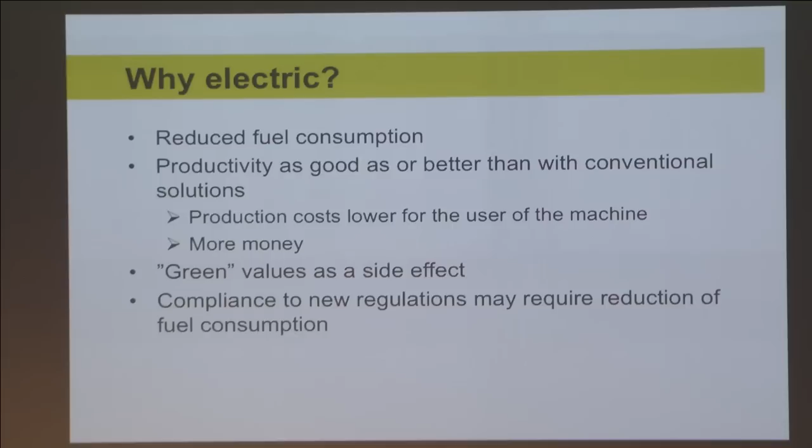And of course, green values come as a side effect - we create less carbon dioxide emissions or small particle emissions and so on. It's easy - or I'm not a salesman, of course, but it should be easy to sell this to companies. Practice might be different. Another driver is new regulations demanding manufacturers of work machines comply with stricter emission requirements, including small particle emissions.

Here are a couple of examples of electrified or hybridized mobile work machines to give a better idea what I am talking about. The first one is an excavator which has a diesel engine, the red one here, which turns the electric generator, the green, controlled by an inverter that transforms the electrical energy into DC. In the DC link, which is this yellow part, we have an energy storage device, this blue box, which could be a supercapacitor for example. And here is an actuator, an electric motor, driven by another inverter, the bluish box there.

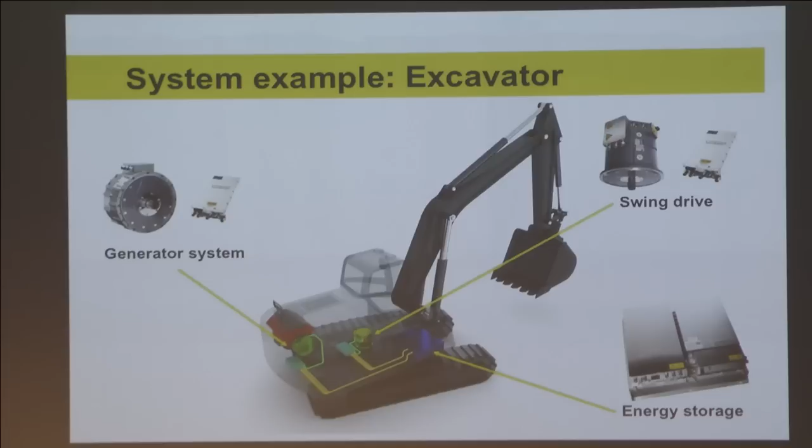So what this machine does - well, it's an excavator, it excavates stuff like this. When it does only this, the electrical system doesn't have much to do. But when it accelerates and then decelerates to dump the earth someplace else, then there is potential for storing the kinetic energy and then releasing it again when accelerating and decelerating. So here we have one key requirement for energy saving, which is usually cyclic operation.

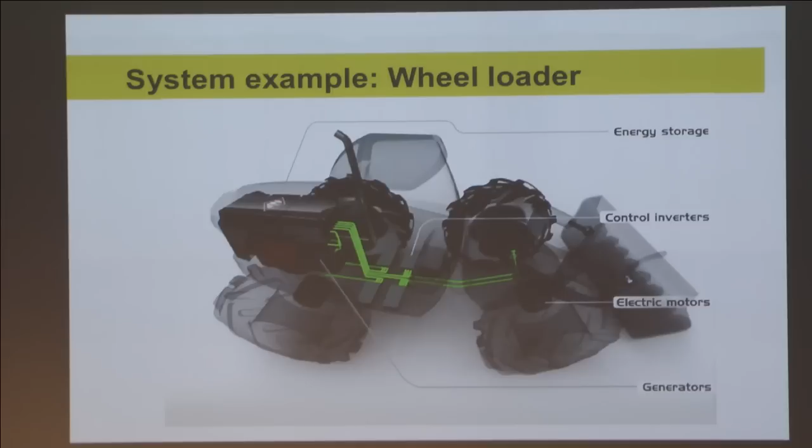Another similar example is this wheel loader, which uses electricity to drive the wheels. There are 4 drive motors in the wheel hubs, and then there are again these same components: the diesel engine turning the generator and the supercap in the DC link. So here we accelerate and decelerate when we load stuff into the loader.

Now, as this is a scientific conference, I thought it would be fitting to include some points on different topics which we consider important or interesting in our field of application. Electric machines are relatively old technology, 100 years or more, but still development takes place and needs to take place because requirements are changing.

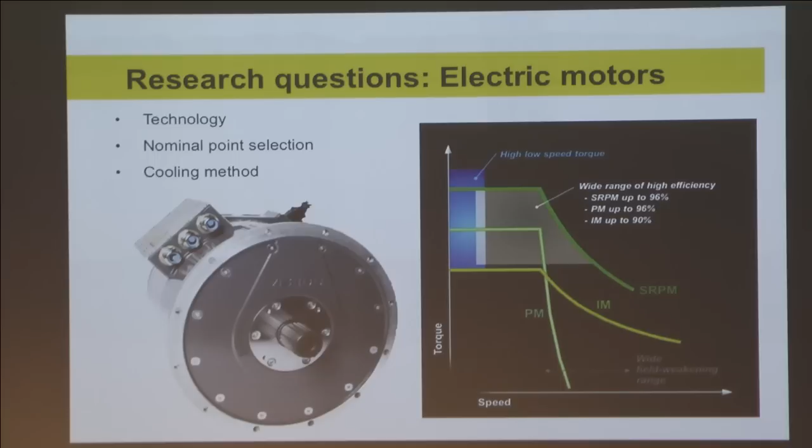In the mobile work machine segment, customers usually want the world's strongest man and the fastest man to be the same man. Namely, they want a lot of torque in the low speed range while being able to run very fast deep into field weakening, or better still, run very fast without getting into field weakening. So demands are conflicting. New technology has emerged - our current solution relies on permanent magnet machines with some reluctance torque also in them.

New technologies might be suitable, switched reluctance machines, for example. Then, whatever the technology, we need to select the nominal point and the characteristic of the machine so that we find an acceptable compromise between these demands of speed and force.

Cooling is something important in mobile machines. Air cooling is not usually very good. You have a lot of dirt and other obstacles in air cooling, and fans are easy to break if you have external fan motors, which is not usually the case in electric motors. But anyway, air cooling is not good. Liquid cooling is better. That liquid in our products is water or water glycol, but also oil cooling would be interesting in some cases, and this has been studied.

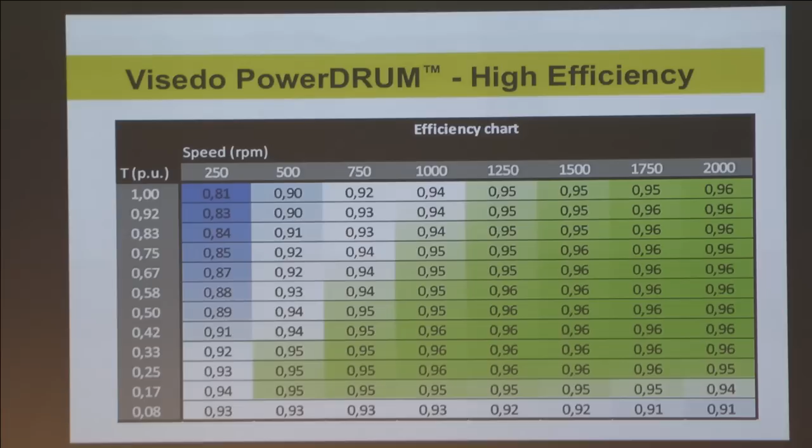Another requirement is to have the machine work efficiently in a wide set of operating points. Here is an example of our own machines and their efficiencies. So it's not enough to make a good machine in the nominal point, we want to run it in different points.

Motors are one thing, or generators and motors, and then we need power electronics to control these motors. Drives or inverters pose some interesting questions to us. Motor control is also not a very new art, but still there remains things to be studied, especially if we develop new types of motors. And we need, of course, good control to run them.

Safety systems, DC link capacitance sizing, efficiency. We need to have also in inverters a very wide operating point set where we run in high efficiency. And we also would like to minimize the losses in the inverter to minimize the need for cooling.

Then lifetime: the loads in mobile work machines are very often cyclic, and they need to be handled well if you want to save a lot of money. The requirements for semiconductor durability, lifetime, and performance with aging are high. And then cooling here is a major thing too. Transporting heat is not often as easy as it sounds.

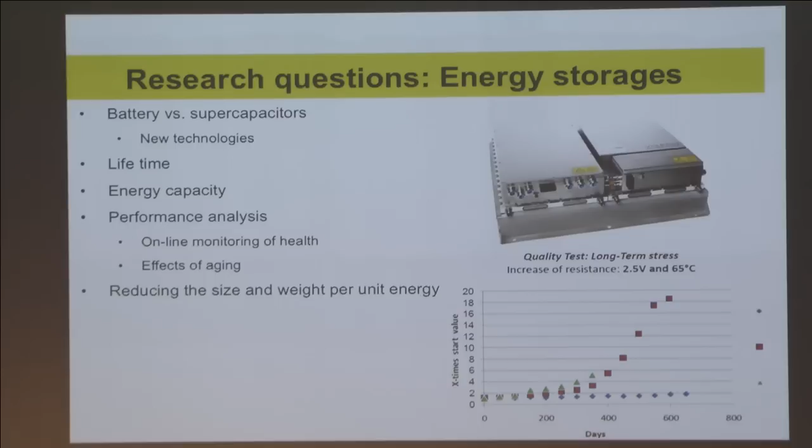Here are some comparisons of some unnamed technologies with cyclic loading in high temperature, 65 degrees. And the best is, of course, our solution.

Now, I personally think that this systems part is the most interesting here. Component sizing is, of course, the first thing to, well, if not optimize, then at least make good enough. Pick the correct size for the diesel engine, for the generator, for the motors, and so on.

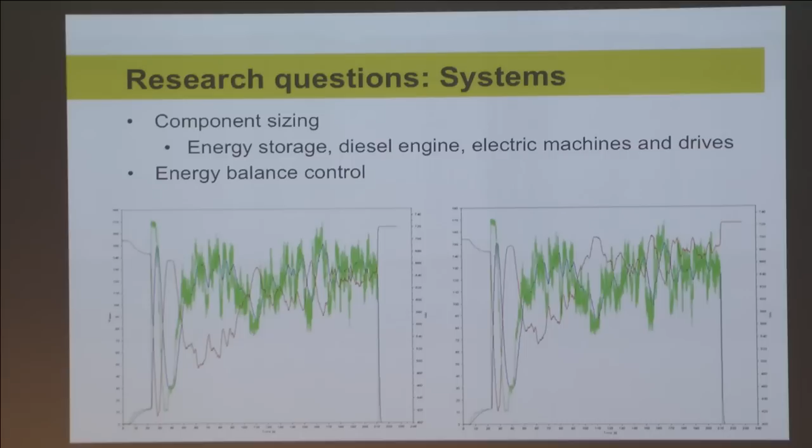If you let the voltage drop low, you are using your energy storage efficiently. The diesel will probably sound more civilized, it's running on lower speeds. But then again, you increase losses in your electric system, and you don't perhaps have the torque reserve needed for some high load peak. So if somebody would tell us what's the optimal way to control the energy storage voltage or capacity level, we would be very happy.

Well, system problems don't end here.

Sometimes it would be interesting to see comparisons between series hybrid and parallel hybrid. Energy flow management, the control principle - who controls the voltage? Is the voltage controlled? Do you calculate powers, or what do you do?

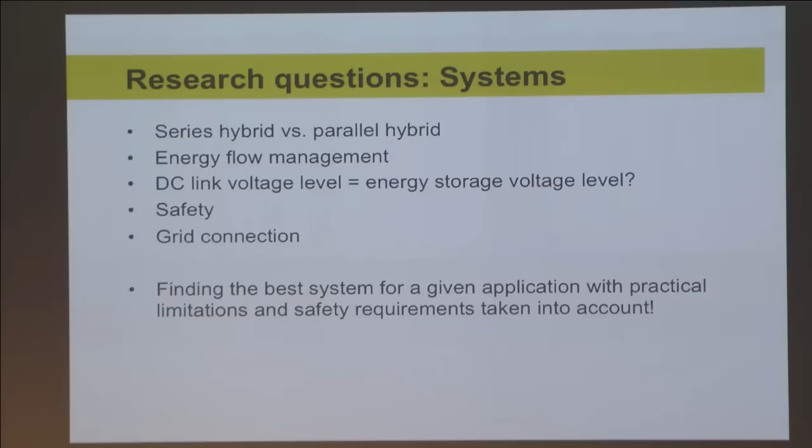That's something interesting. The next point is a question: should the DC link voltage be the same as the energy storage voltage? This translates to a question of whether we should have a DC-DC converter in between. This would eliminate the excess losses caused by low DC link voltage and allow the electric system to run with better efficiency. But then again, a DC-DC converter with sufficient current handling capability is not cheap. So would it be economically feasible to use one?

Safety in systems. What do you do if an inverter trips? How do you brake then, and so on? Grid connection could be used in some cases when you park the machine somewhere to do the work. Then you could plug in and take some energy from the network instead, which is usually cheaper than buying diesel.

So all in all, it would be a matter of finding the best, or actually even good enough system for a given application, with the limitations posed by the application taken into account.

Now for the actual beef of the show, which was to crush - literally or less literally - the fuel consumption. The example is a stone crusher from an Austrian company called Kormann Rockster Recycler. It's not a particularly big stone crusher, but still quite an awesome machine.

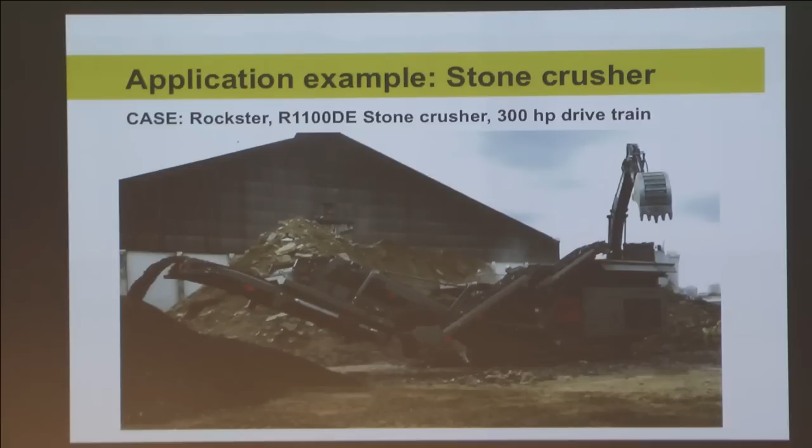It's used to recycle material. In this picture, you see that there are some concrete slabs and sand and stones here - probably the remains of a demolished house. This picture was taken at the Rockster test field in Austria.

So it's a series hybrid machine where we generate electricity from diesel into DC and then consume it in the crusher motor. So there's no mechanical connection between the diesel and the crusher.

Here is an unnecessarily complex figure of the same thing. I just left it as it is to show that there are a lot of little pieces other than the ones mentioned. Here's also shown a network connection option, which was not implemented in this first prototype or first machine.

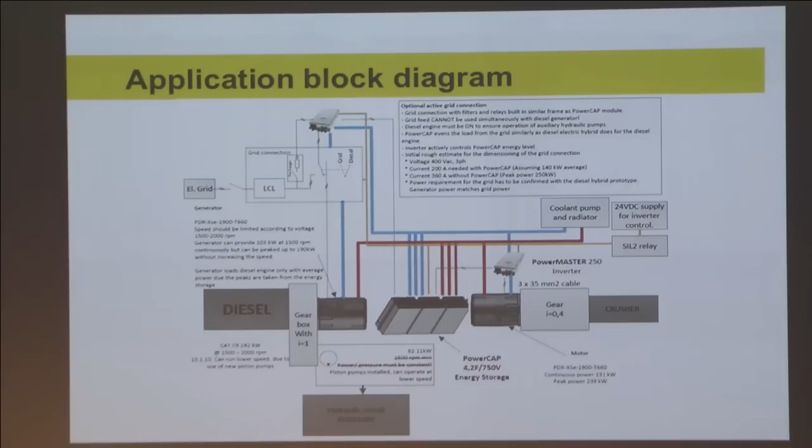Here are some measurements from an end customer. The machine was completed a little more than a year ago and delivered to a customer in France who have used it since. These measurements show that we have succeeded in making an electric system which runs at relatively high total efficiency at all operating points - here when it is loaded, and also here when it's practically idling.

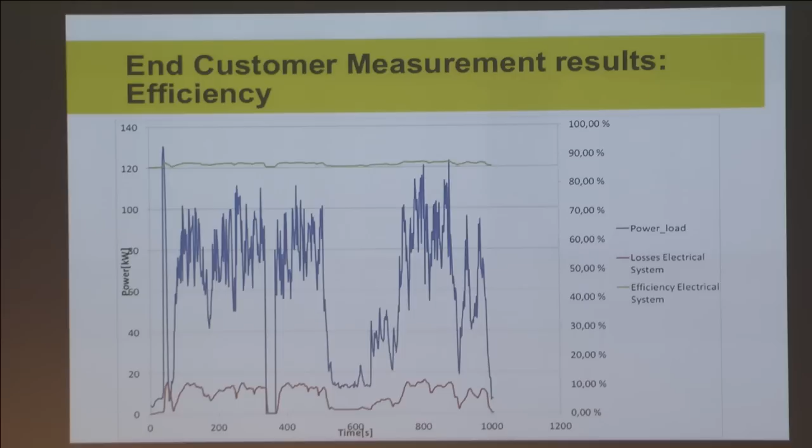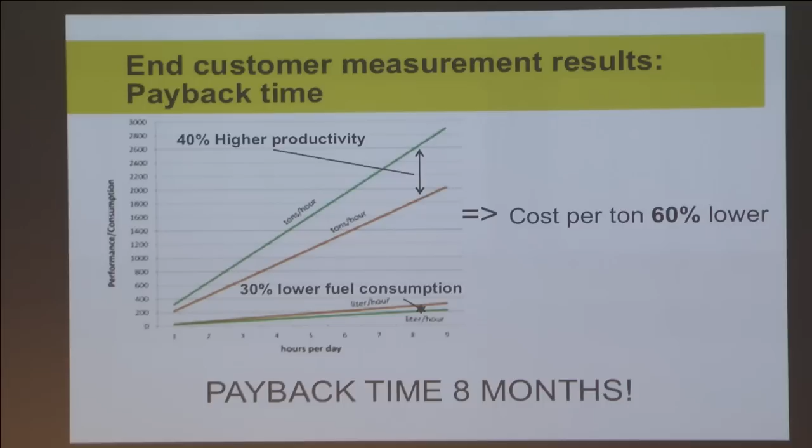And here are some figures relating to what makes this machine economically feasible. Well, we did save the fuel as we promised - here it says this is 30% less, and that's probably rather accurate. But at the same time, we also increased the output of the machine. The electric motor is capable of crushing with higher torque than the previous solution, which was a hydraulic one.

Now, cost per ton is significantly lower. I'm not quite sure if these figures calculate exactly, but the key idea is still correct: both an increase in production and a decrease in fuel consumption.

And this gives us a payback time of 6 to 8 to 9 months, depending on how you think the interest rates are. As the lifetime of this machine is significantly higher than half a year or three quarters of a year, this means it's very economically feasible.

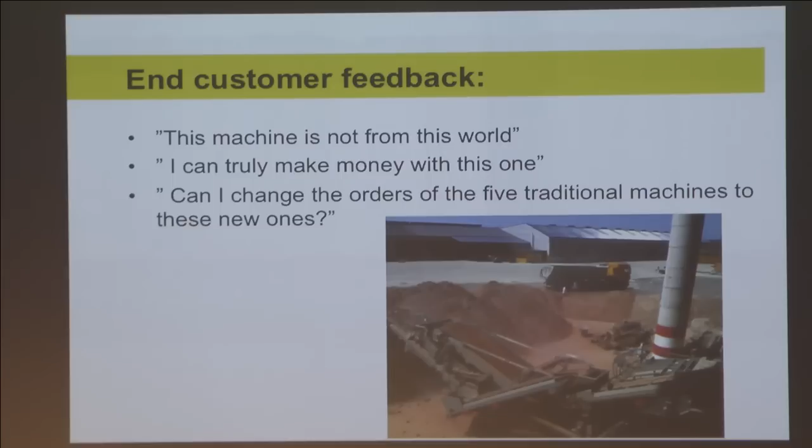And the customer has been happy, quoted as saying that this machine is not from this world, and now I can make some money. But if I was an operator or owner of this kind of machine, I wouldn't buy this traditional thing after seeing how well it works.

Now, I think we also have a little video here to give you a better practical idea how the stones are crushed. This is also from the Rockster test field and not from the end customer.

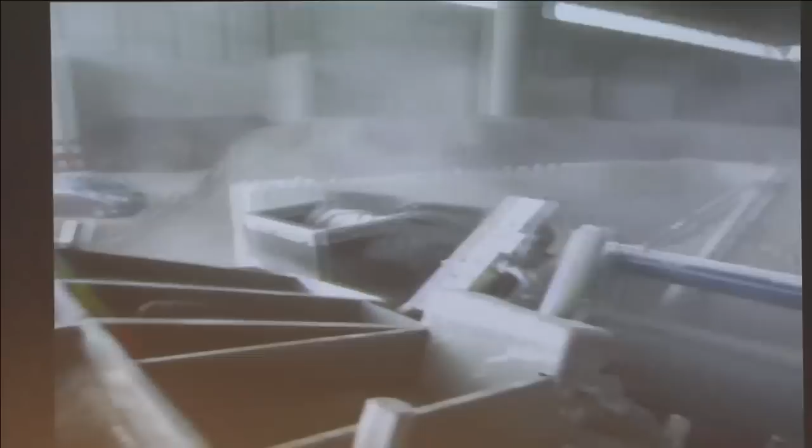Yeah, it's much faster than a man and a sledgehammer. Oh, okay, thank you everybody.

Shall I stay here to answer some questions? Do we find questions immediately from the audience, or shall I put the first one? Actually, I don't see if there is somebody... the microphone please. I think I can do without. First question would be, can you make this presentation available? Yes, I think I can. If it's not already available, I'm not sure.

Thank you. Okay, more questions from the audience? Another question, please. Okay. I could hear you very well. I don't know about the audience, maybe the audience has difficulties.

Very interesting, thanks. You hinted that lifetime of power electronics is one of the issues, and you also stated that the machine has to last longer than those 8 months of payback time. I assume you calculate 15 to maybe 20 years of operation? Well, I don't know very well this particular case, how long they plan to use them. I don't know if it's 20 years. So in this case, probably the power electronics will not be an issue, or their lifetime will not be an issue. No surprise, it's not.